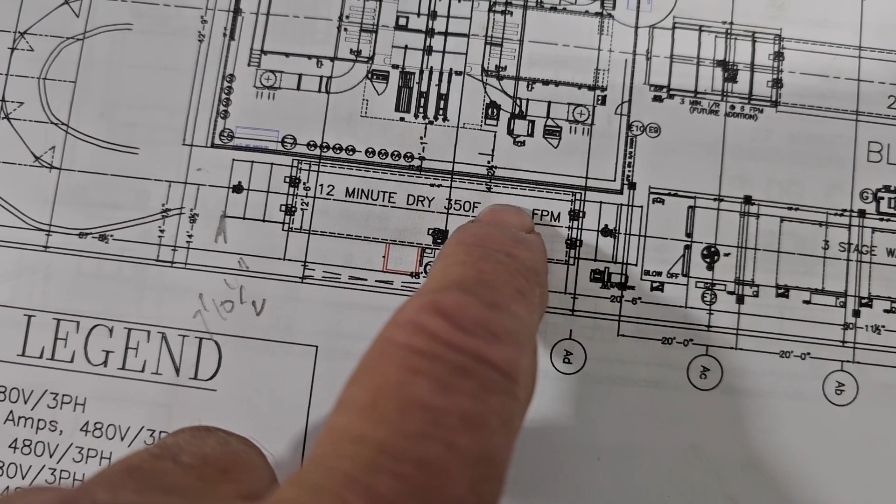It's a 12-minute dry. When they say 12 minutes at 4 feet per minute, the 4 feet per minute is the line speed. That's the speed of the conveyor line. And at 4 feet per minute, it's going to take 12 minutes for the product to get through that oven. All right, so we're working on that section of it.

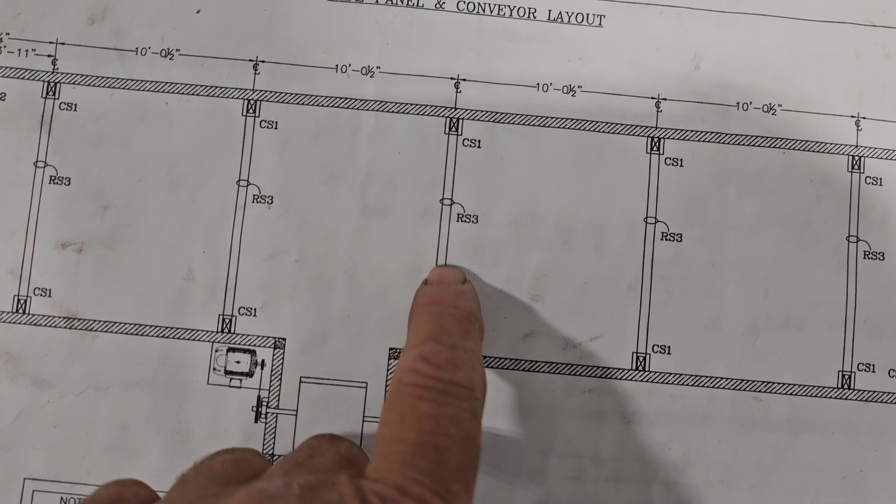And this is the actual dry off oven here. These are going to show all your structural supports. This one page covers all the structural supports. It covers all the wall panels, and it covers all the floor channels. So this one page is up to that point. So let's go look at the oven.

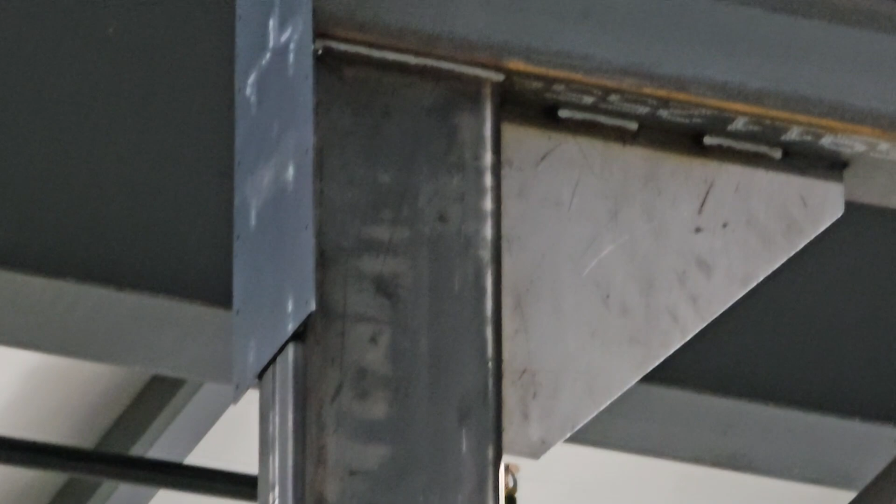Okay, and as you can see, we got all the black iron hung. Like I said before, we got all our high reach welding done on those joints up top. Might be able to zoom you in up there, maybe. Yep, that's all your high reach welds up there. Oh, you're zoomed in 12x. All right, that's too jumpy. We're gonna get you back. Anyways, we call those horseshoes. So we got all the horseshoes up.

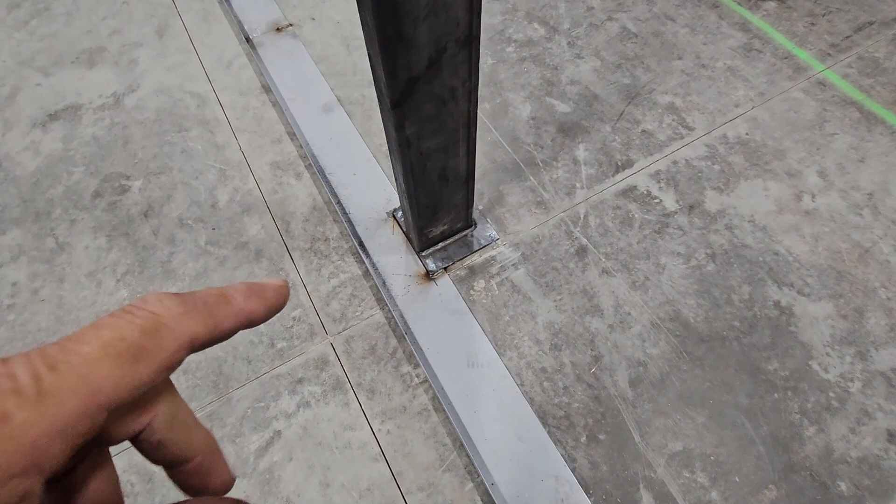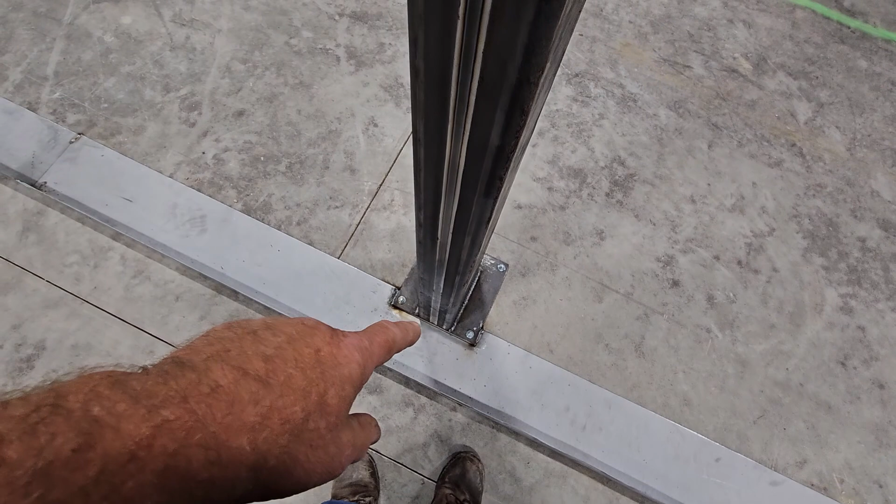And after these are bolted down and squared to the floor, everything gets bolted down there. Then we come in and we put a floor channel down. We take a plasma cutter and notch around the base plates, and then we tack weld the floor channel to the plates so they don't get lost, and we keep a gap between the column and the outside of this angle right here. That's like a 1x8 angle, and we do that with a block of wood. We keep a very specific distance between the column and the floor channel. That gives us room for the wall panel.

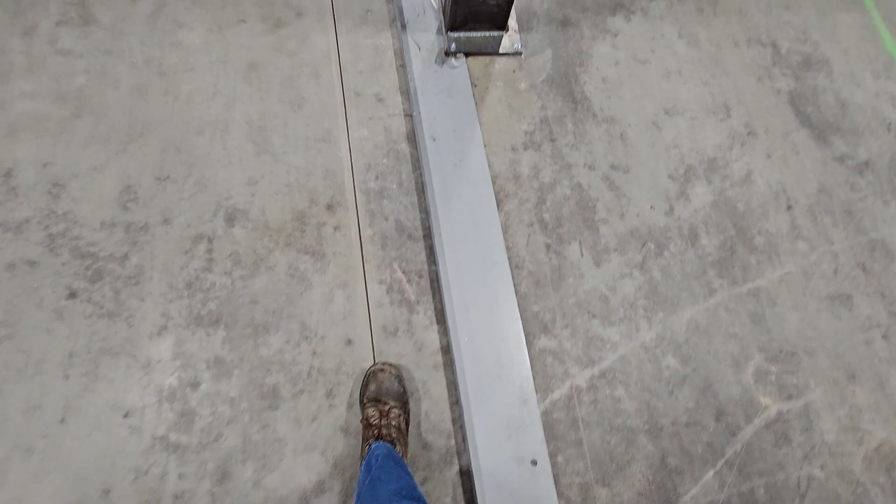So the black iron is internal to the oven. That's why we don't paint them. It would just burn off the paint anyways, so it doesn't make any sense to paint those beams. Anyways, the floor channels get tacked together at the seams. Just get a little tack weld there, and then tack welded at each base plate. And it's more the same all the way down.

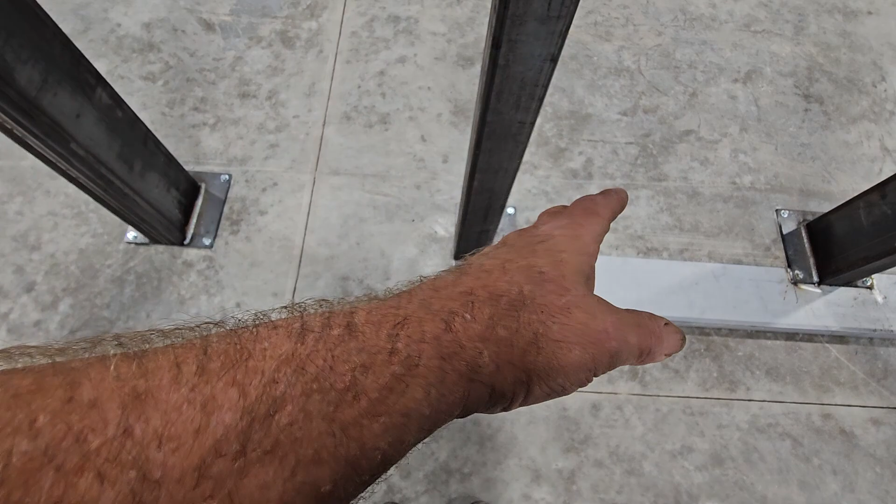Now technically the oven ends right here. This is where you're going to have an air knife. This is where the product's coming into the oven, but there's a recirculating air knife right here that creates a barrier between the superheated air and the ambient. Out here, they call that a vestibule. There's a small vestibule that also has a conveyor key in it. So it'll have a conveyor key out front here. You'll have another conveyor key right here at the air knife, and it gives a place for the air to do the transfer and not dump a bunch of hot air out into the shop.

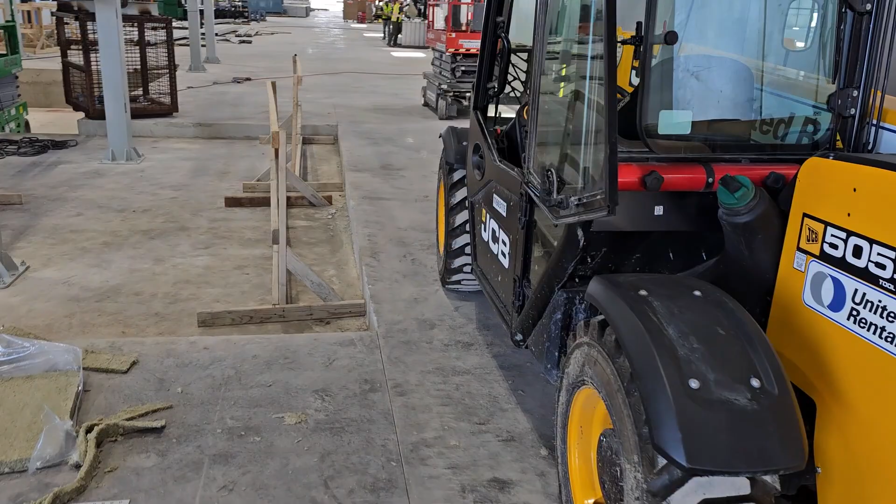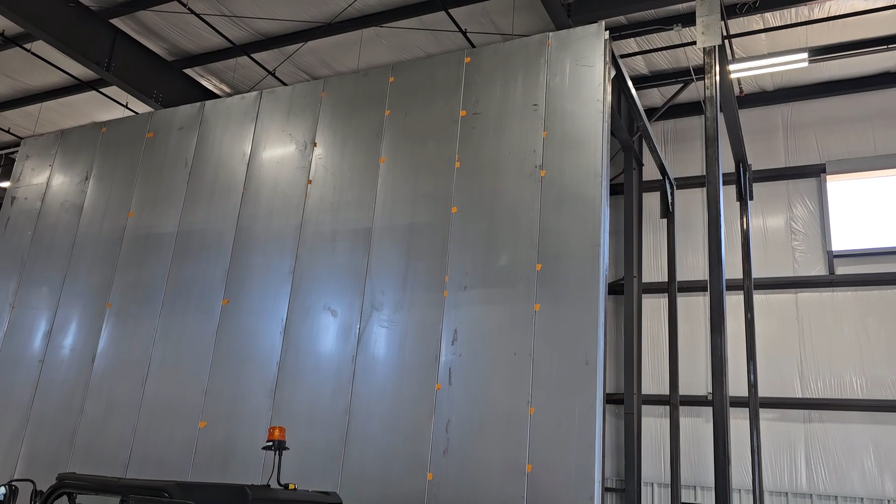Okay, so we've been hanging wall panels. We switched out our reach lift to this tiny little guy. It's actually really small and really maneuverable. It's got 20 feet of stick, and it gets us up there and puts up our wall panels. These wall panels go into a floor channel that we welded in. I think I showed you those earlier, but I'll show them to you again.

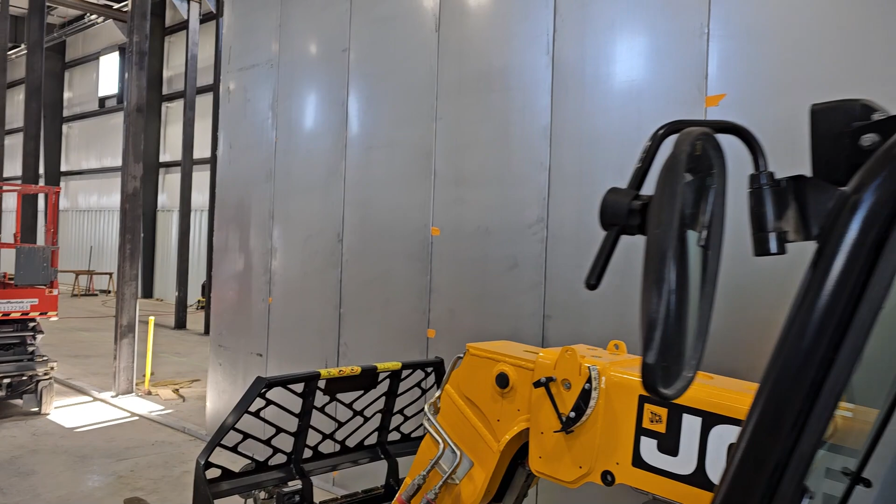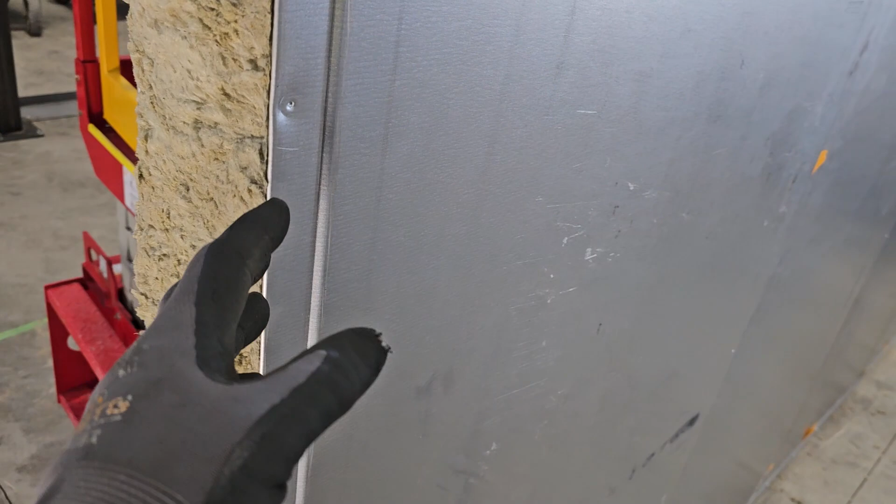These wall panels are 20 feet tall. So it's quite a heavy 6-inch thick rock wool double skin panel. And those are the panels I showed you laying on the ground. The orange tape you see is temporarily taped on the rock wool. There's rock wool in between each seam, and we pack the tongue side with rock wool before the groove comes over it. So you got a tongue and a groove, so they fit together tongue and groove style. And that's the floor channel that got tack welded in right there.

But we're standing wall panels. This right here is half a day's work, putting these up. And see these wall panels attached to that plate right up there, and those have piloted holes, and those drill into the actual sheet metal. That's what keeps this whole wall standing.

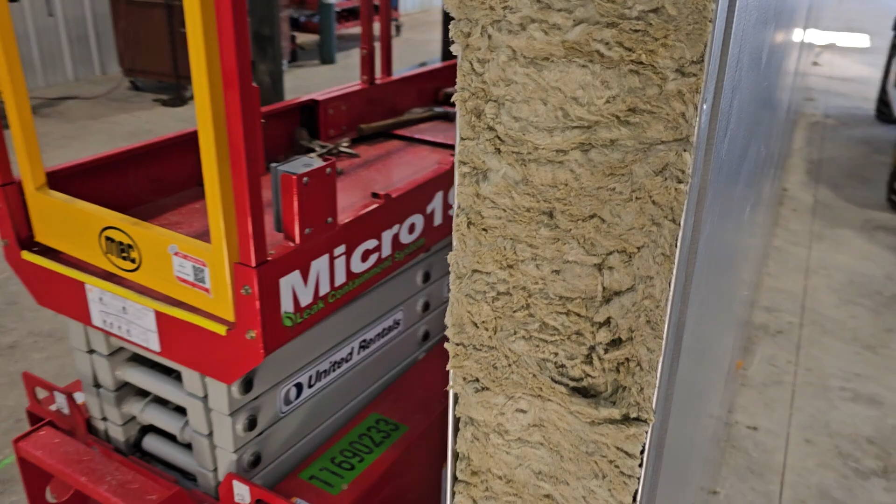All right, so basically all the steel structure, you know, stays inside. That's why they don't get painted. This is the interior of the oven. So if we painted them, it would just burn off the paint. So they just ship them black.

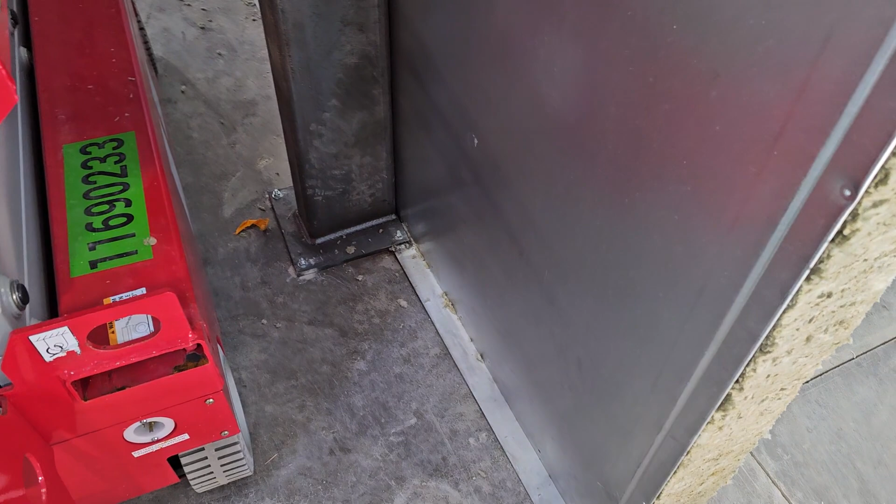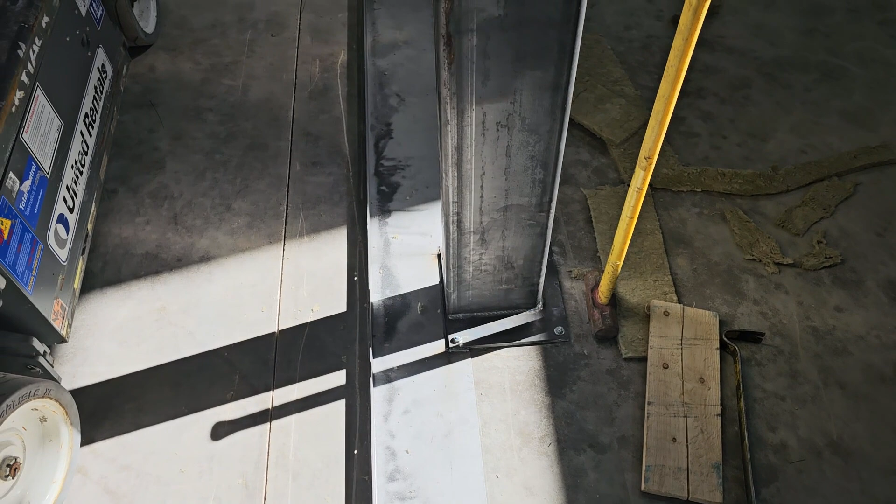All right, but that's the gap we had to leave in between the actual column and the floor channel. We made little temporary wood blocks to go in right there. That's to create a space for our wall panels. So we made those blocks 6 1/8, and our panels are 6 inches on the dot. So it's a very tight squeeze. But we've got that much wall to build here. Hopefully we get out to that by the end of the day. We roll through them pretty quick.

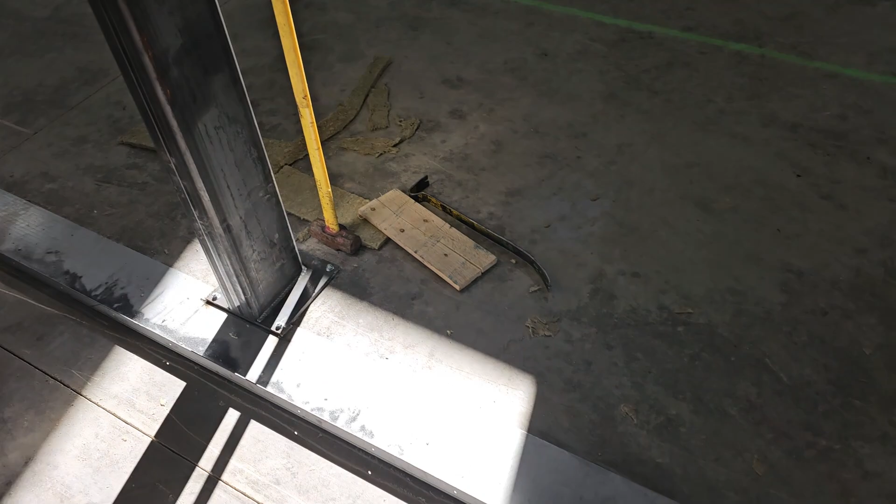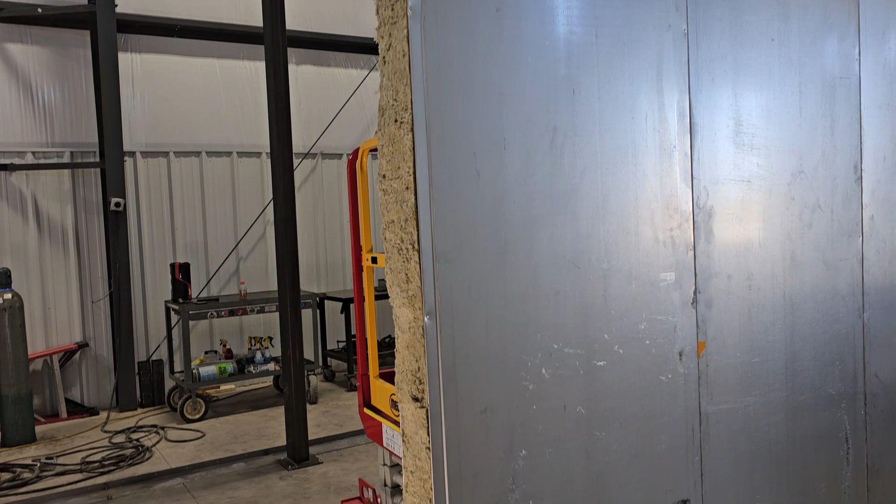We bring them in knife edge on a couple dollies, hook it up to that rig on one tip of one fork, and just zoom it out and stand her up. 2 guys on the ground, 1 guy on the lift, and then we drop them in and back them off a little bit. We fully engage the panel, and then we pull it back about 1/8 of an inch to allow for expansion.

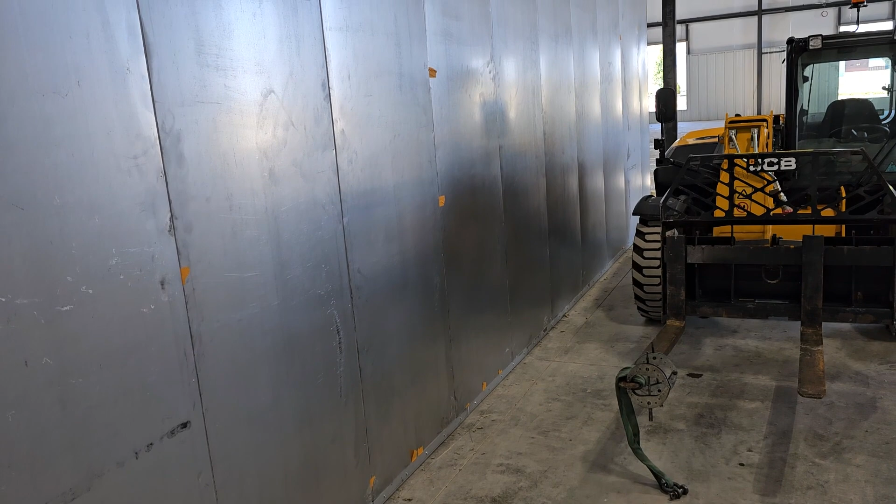Because these panels, when they get hot, they expand. If you put an oven together too tight, you're just asking to buckle the floor channel or buckle a wall or something. So never put an oven together tight. You always put them together loose and let them expand.

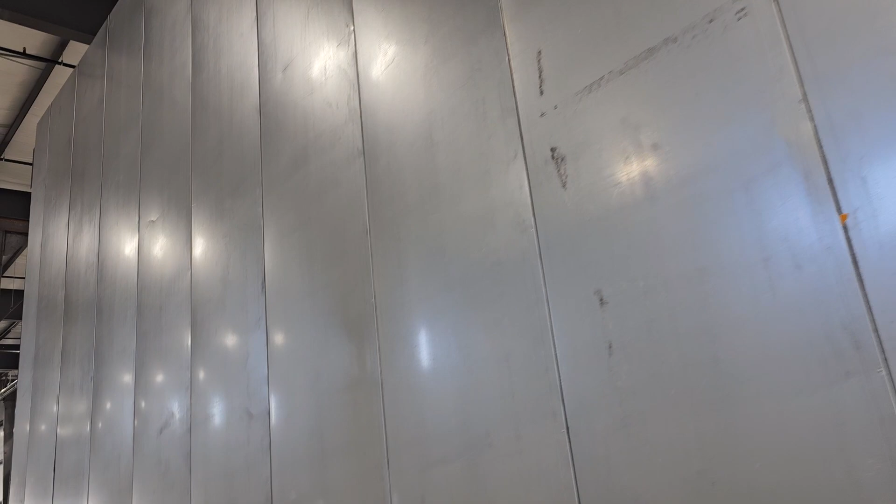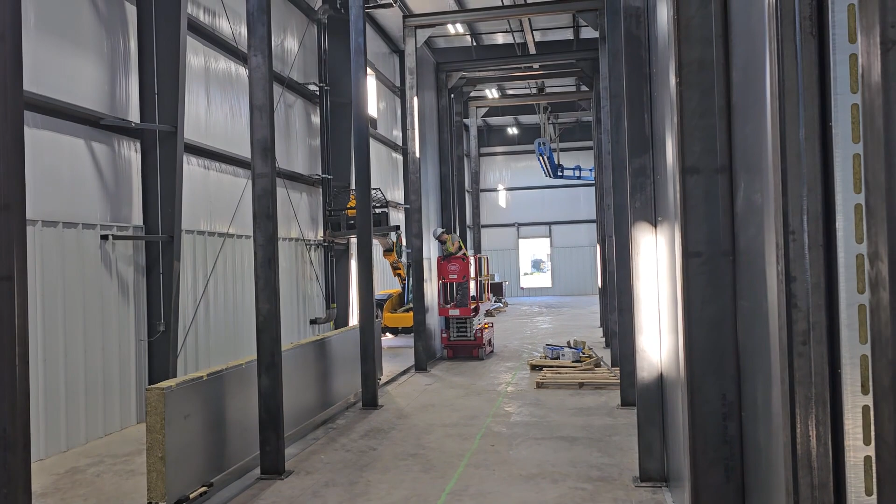Okay, so we got this wall hung yesterday. Today's Tuesday, so this wall is up. You still got to get a lid on this oven, but that'll be after we get the other wall done. So we're up to here. These last 2 columns are for what they call a bonnet or a vestibule, and we're working on the ones down there. So I got that little tiny reach lift down the aisle. That reach lift just barely fits, and we can stand our panels up pretty easy. It's hard to get far enough away from this thing to see what's going on.

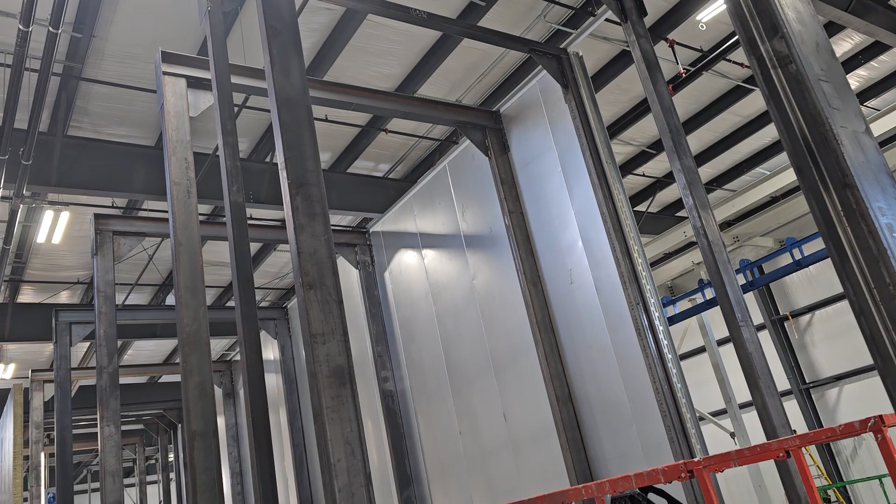So that'll be this other wall. After this wall is done, then we put a lid on it. The lid lays on the I-beams going across and gets fastened on the ends to the wall panels. Up on top, I guess you can see, do a zoom here, a little sheet metal angle that runs across the top there. It's at the top of the wall panels, and that's what ties into the roof. And then the roof panels are big enough to span the I-beams and just literally lay on top of them. So they get mechanically attached on the ends, and gravity is with us and holds it down on the beams.

So that'll be a lid. And then we got to do end caps at the conveyor ends, which they call air seals. But this is, believe it or not, the small oven. All right, so it's Tuesday morning. We're going to get another wall hung. We'll bring you back later today or early tomorrow.

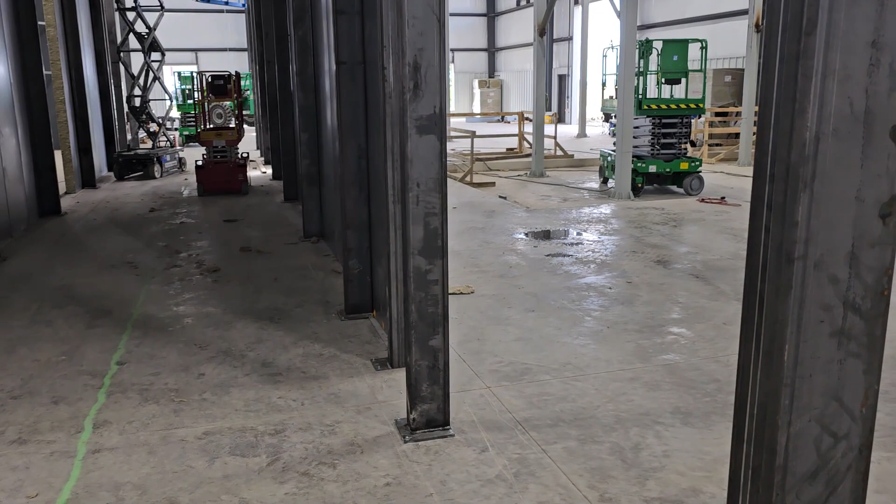Okay, so they're working on the lid now. And walls are done, both sides. I don't know where I picked up last. I don't know when's the last time I shot a video. Walls are done down both sides, and they're screwed to our floor channel. And the ceiling pretty much just lays on top of all the iron.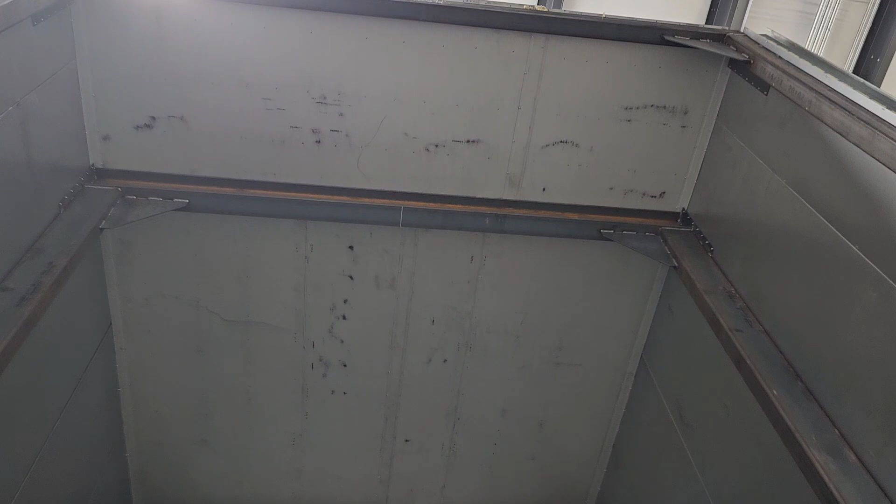They've got what they call blowout panels. I don't know if you can see in that second bay. You get up from that light. That second bay, there's a strip right down the middle, and what it does is it only attaches on one side. If there's an explosion inside the oven, the lid blows off.

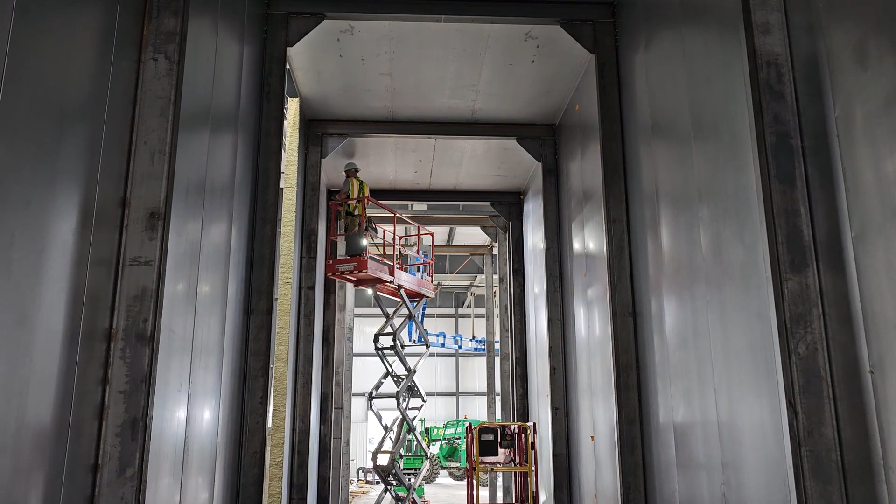It's attached on the end with those little trim angles, left and right. That's the only place it attaches. It just kind of straddles the beam and lays there. If there's an explosion, the ceiling just kind of burps up. And that occurs in 3 places in the oven. They're down on the last section of the lid.

The open wall you see, that's where our air handler goes in. Air handler is our blower and our burner and all our gas controls. Those go in. We don't have those yet. So that's what's coming in down in that open bay right there.

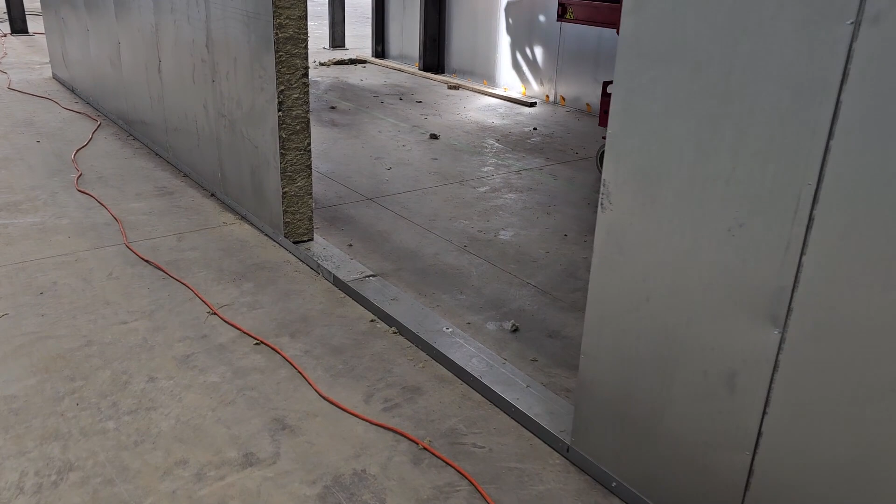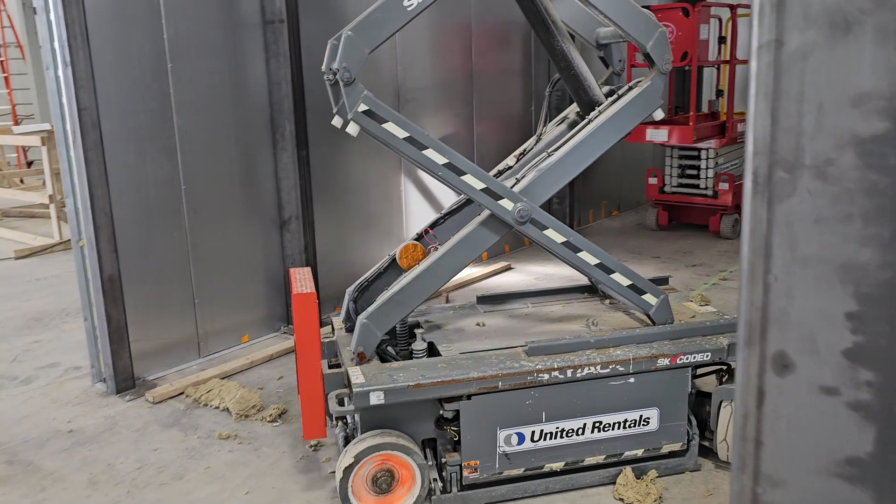Alright, so today's Wednesday, and we've got pretty much an oven, the main frame of the oven standing. And they're inside just anchoring that lid on the end channels. Okay.

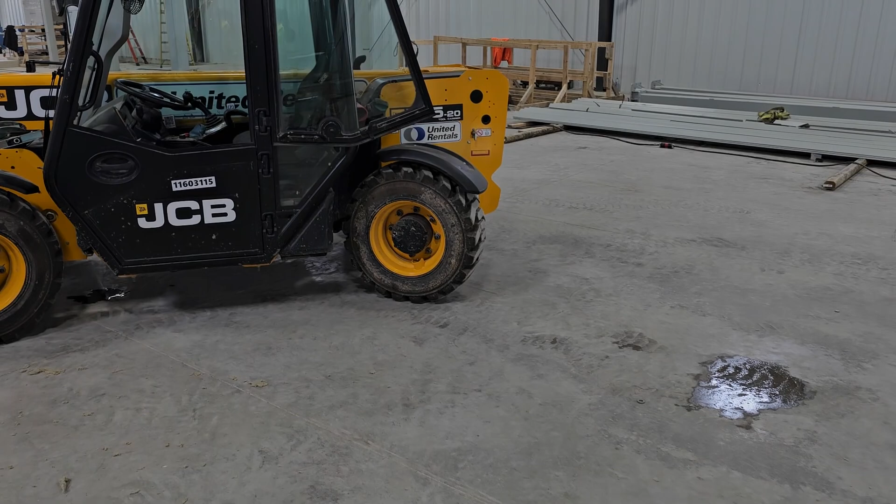I actually got rid of my big loader and got this little guy. This little thing is so versatile, it's not even funny. It's small, it's maneuverable, it fits down the aisle. I actually used it down that aisle there to hang the wall panels. Super easy to drive,

smooth little machine, and she's got 21 feet of stick on it. It'll get up 21 foot, so it'll get up on top of our oven to land roof panels, no problem. So I'm really glad I traded in my big telehandler.

Okay, morning everybody, it's Friday, and I was going to walk around the job, show you our progress during the week. I got to close up this video, get it edited, and ready for upload for y'all's Saturday morning powder coat update. All right, we got the Varzy boys right behind me there working on some columns, and I'm going to flip the camera around and we'll go show you the dry off oven that we just got to a substantial completion where someone else can get in there and work on it.

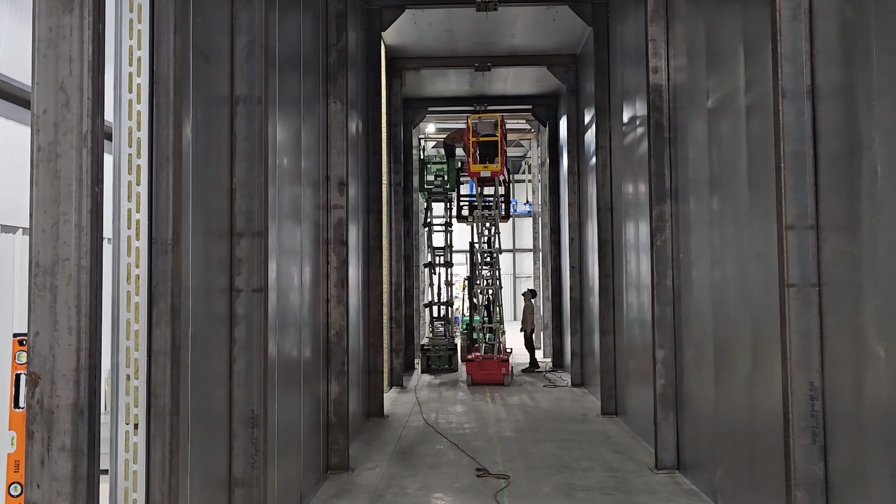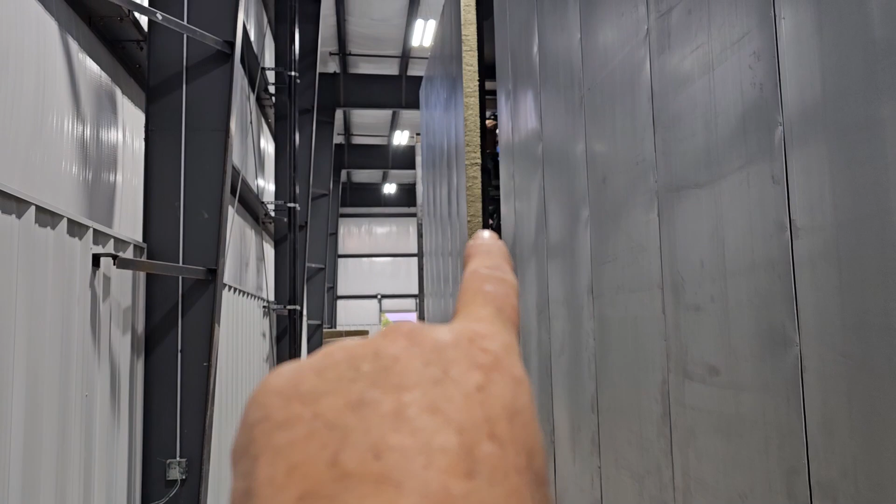This hole right here is for an air handler. There's an air handler that sits on the ground right here, and these little panels here make up the space above the air handler. The air handler is only about 8 feet tall, and then the rest of it's panels up there. So that's an air handler I do not have yet. The air handler actually fits in this aisle, comes this way, and it'll plug right into the side of the oven. But all the grooves are insulated and ready to go.

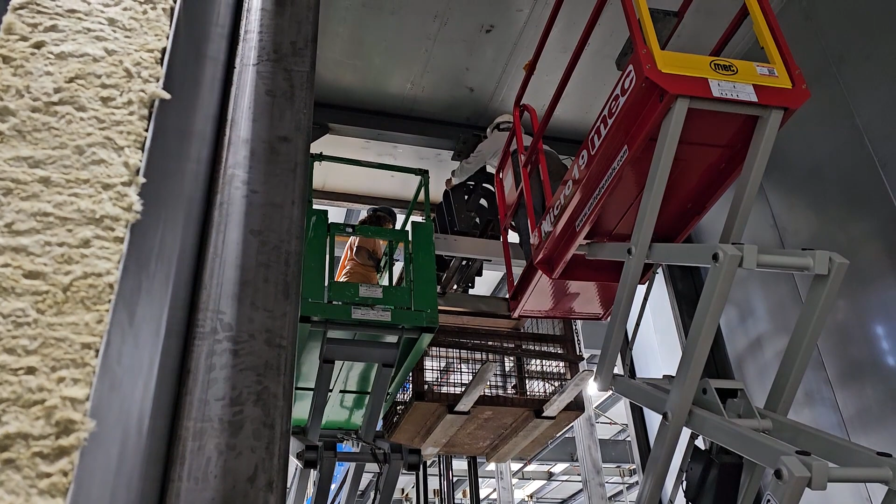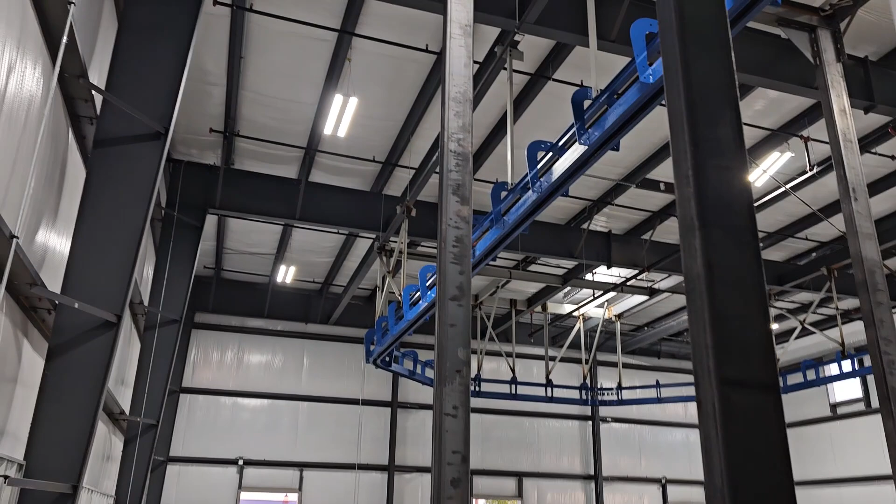Let's go visit Kentucky. Kentucky has put in an expansion joint in their conveyor. Usually a conveyor rail is going to run pretty hot within the oven, and as you would expect, the conveyor rail can expand, and if there's no expansion joint in it, it will buckle. And you see they've switched over to black iron conveyor because it would burn the paint off anyways. Doesn't make a shit bit of difference.

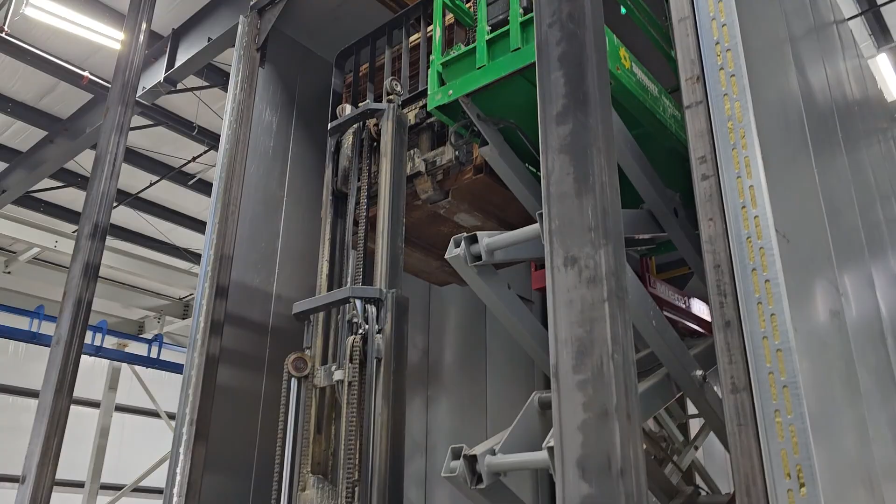Morning, Cameron. Morning, how you doing, buddy? I'm doing good. I can tell you're focusing your chi, grasshopper. Yes, sir. All right. Well, we'll leave you all alone. All right, well, these fellas are doing their job. I'm staying out of their way. I'm just gonna shut up and get out of here. They're doing a wonderful job.

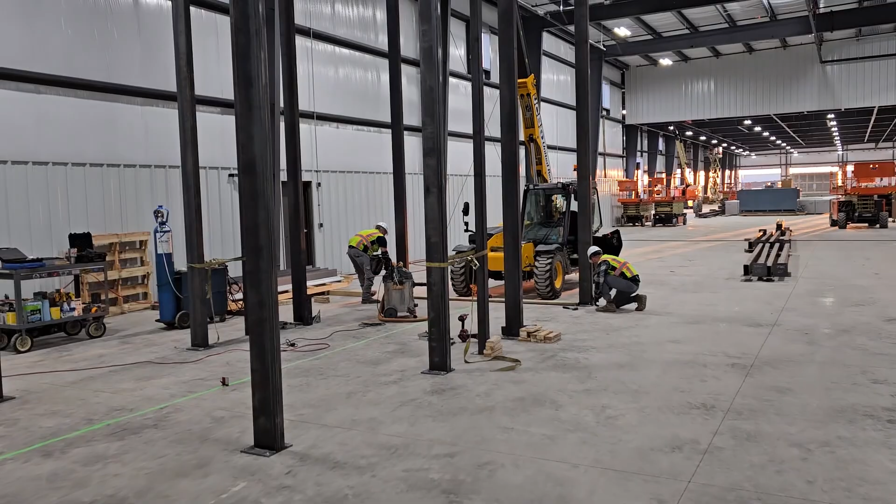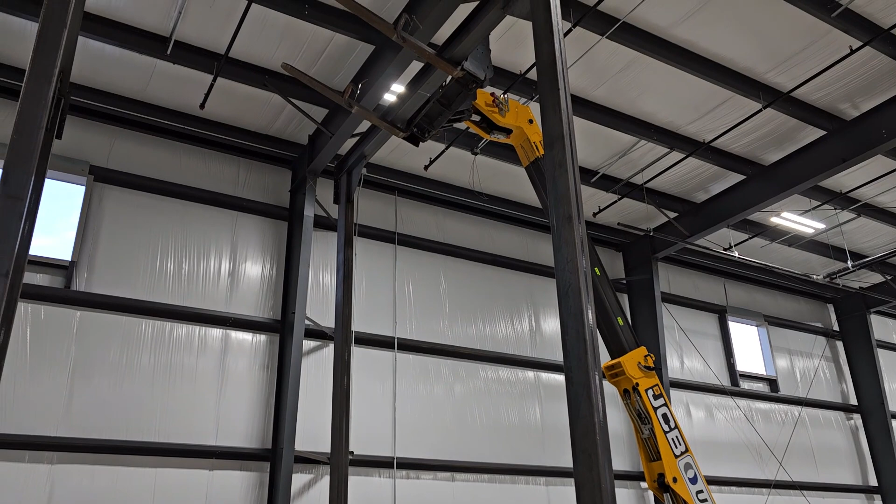We're working on the cure oven, and it's more of the same, but it's just bigger. We got a longer dwell in this oven, so the oven actually has to be physically larger because the line speed is constant. We've got our little loader. All we do is build these horseshoes on the ground and stand them up. Pretty easy to do. We use a spreader bar, which is just a pre-cut block of wood. Then we use a laser to square them up off center line.

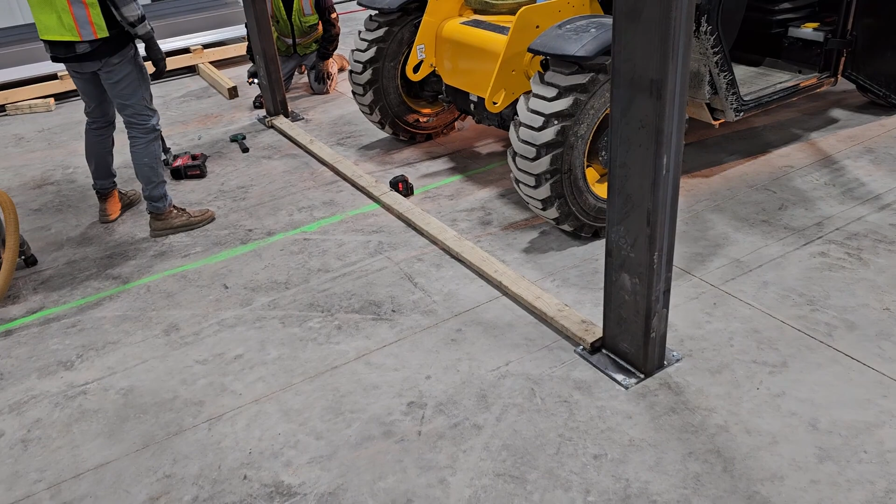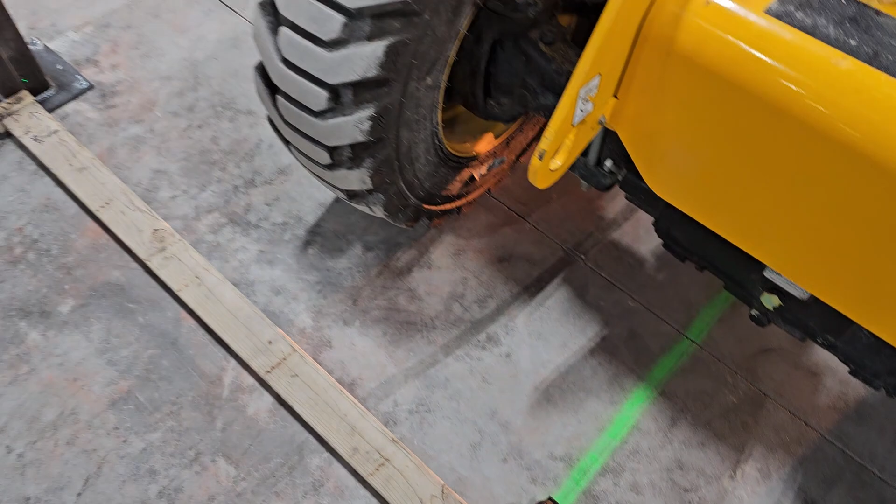We've got a laser there. Let's see if we can get you in the camera lens. No, I'm not that good. I was trying to blind you with the laser. Anyways, I use a spreader block across the center. Green dot over there. Green dot over there. And green dot on the target down there.

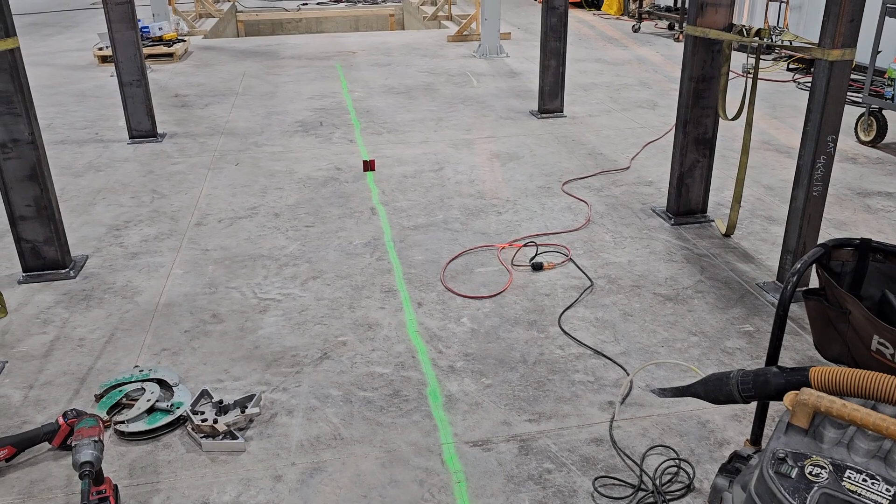All right. And this oven actually goes all the way down to the corner down there, to that fire break. This fire break curtain. So that oven goes all the way down. They had to put a fire break in because this is all the paint shop area. So if this side of the building caught on fire, that's a break to keep the flames from rolling out on the other side of the building. So that's a fire break.

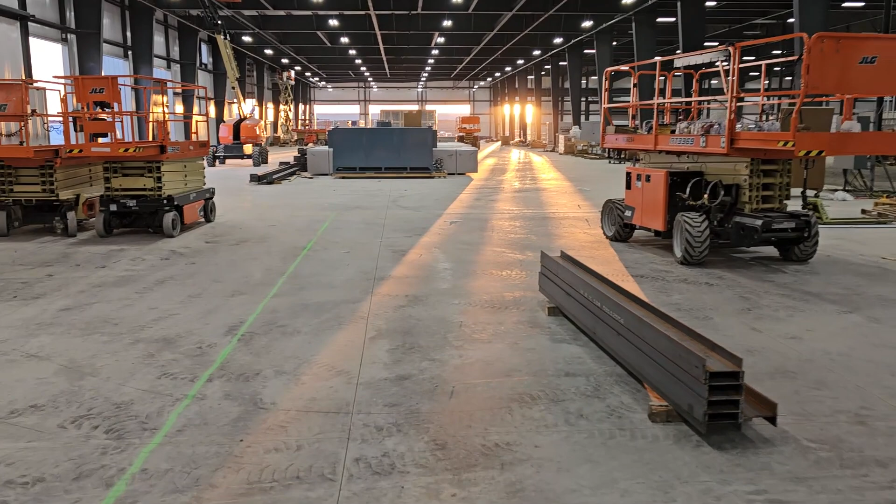Pretty typical when you're separating a paint shop from a manufacturing plant, especially one that has welding in it. The welding area is over on that side over there. So anyways, our oven is represented by this green line and it comes all the way down to the fire break.

So our oven comes clear down to here. And you can see our little string line, how we cut it in. Lay a string down, spray it with some bright, easy to see color. But that's how far this oven goes. This is a big old long sucker.

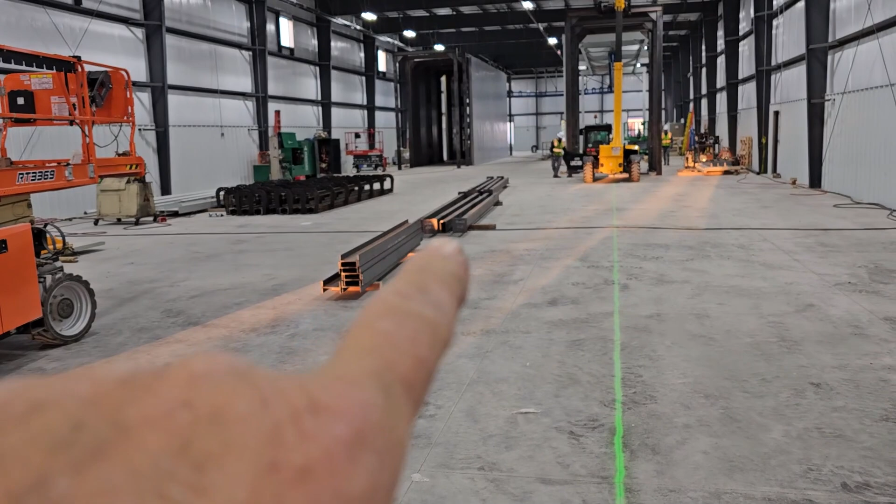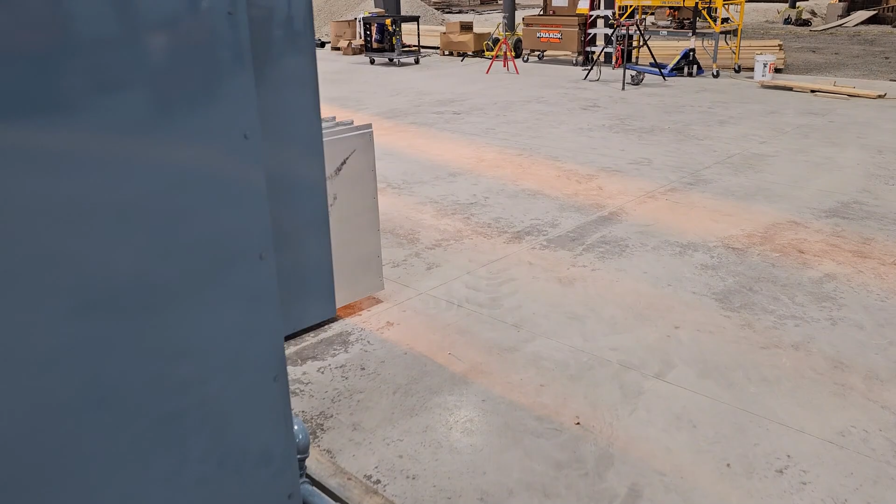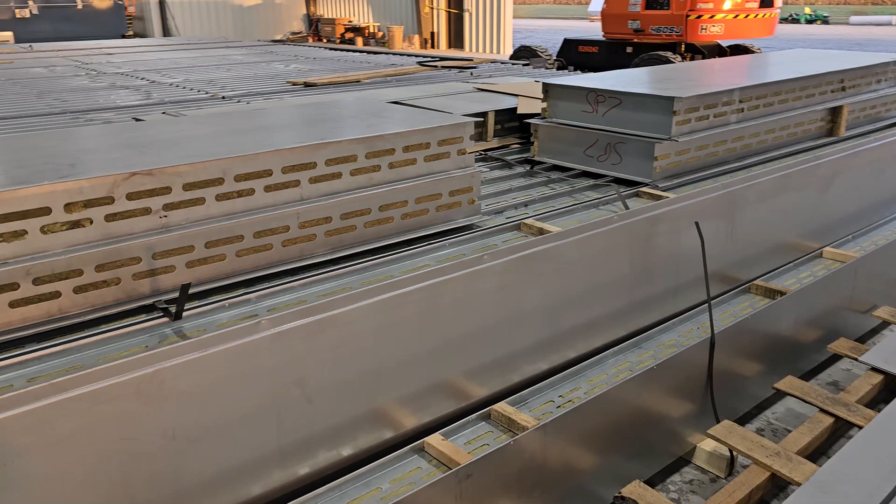Alright. And that's some of our material over here. Those are just our vertical columns and horizontals. So we got a hell of a lot more over here. So that's all the steel we got there. And then after that, it's more of the same. More of the same with panels. Start hanging panels. So all these belong to that large oven. Everything's already used and done for the small oven. The small oven's already skinned, so all this is all for the big monster we're doing right now. Okay.

And then they haven't even got floor in over here. This is the sandblast area. They're doing a pit over there for the sandblast. And then fabrication's kind of over here, and the conveyor runs through all that. So this project's still in its infancy.

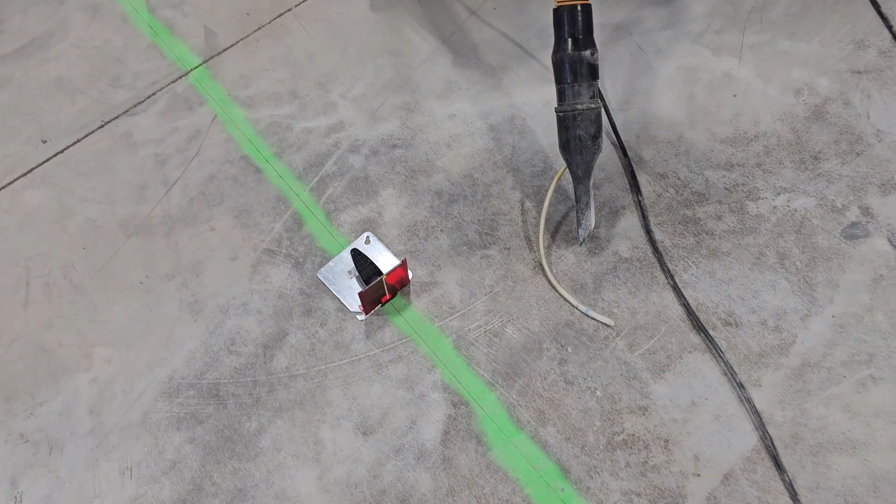Okay, I got a bunch of emails about wanting some detail on the laser. That's the target. It's a magnetic target. I got it sitting on a 4S cover. You can see the green dot on the line. That superimposed line is with my conveyor center line. That's the center of the world for us. Everything gets measured off that center line.

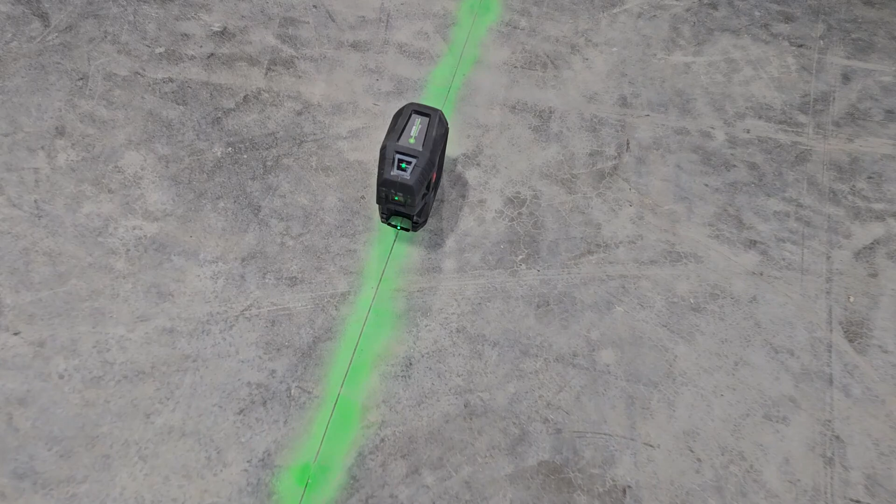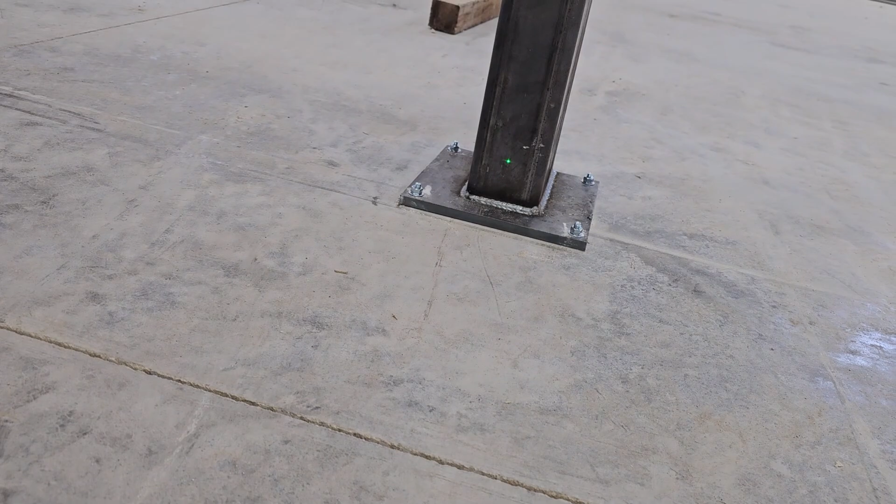So this is considered an x-axis. That black line is considered a y-axis. You see I got my laser dot there. So I've got a laser dot here and out of here heading down to that target I just showed you. And out this side and out this side, we're center line column. And we're center line column. Now the kicker is to get these things in square when everything disappears all at once.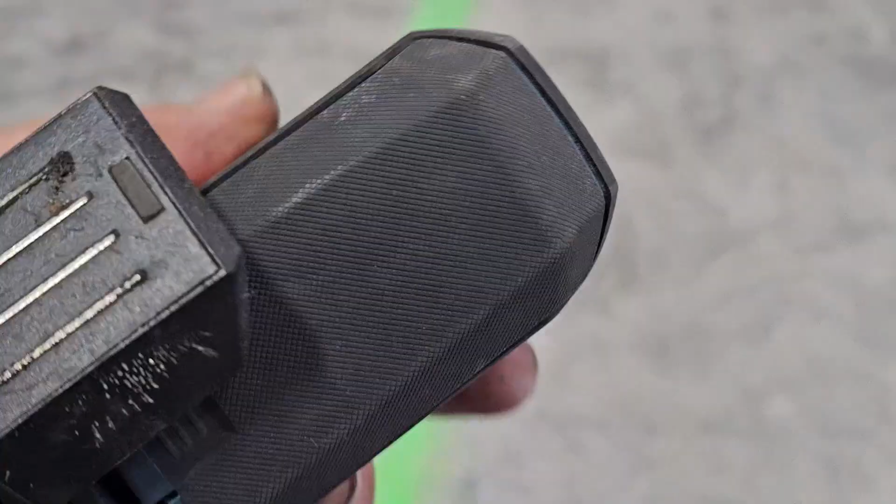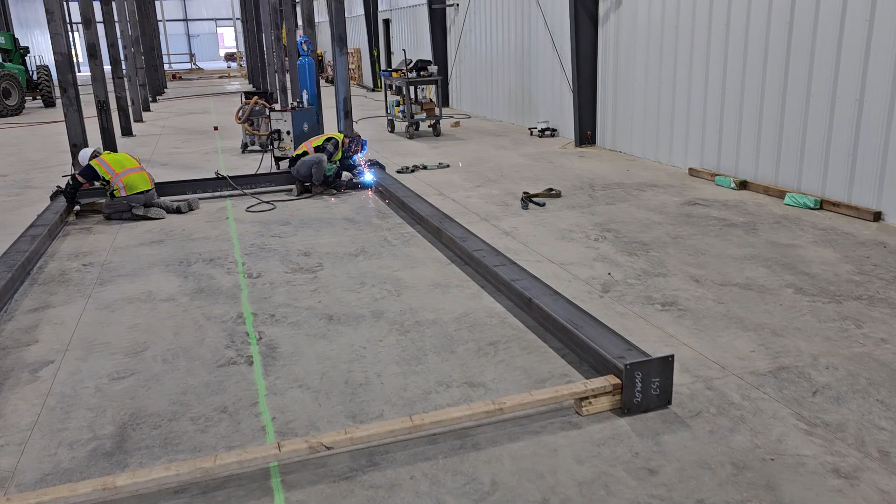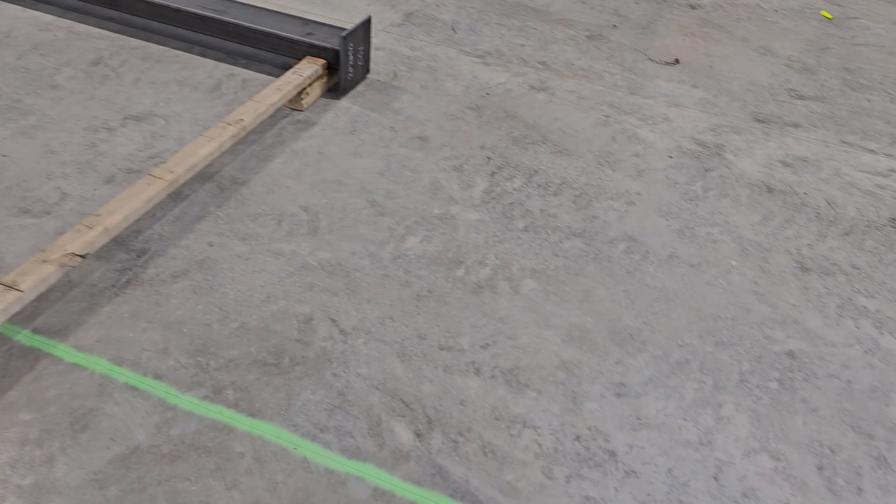Well, we're coming up on the end of the day. This is how far we got today on the curing oven. And we're looking right down the barrel of that conveyor straight through to the powder coat section. And this green line, like I said, represents the oven, which just keeps on going. So we're going to work a little bit tomorrow on Saturday and be able to probably finish this up, get all the steel standing at least. I think we've still got about eight or nine more sections to put together and stand up. But you know, you gotta sit there and square and plumb each one.

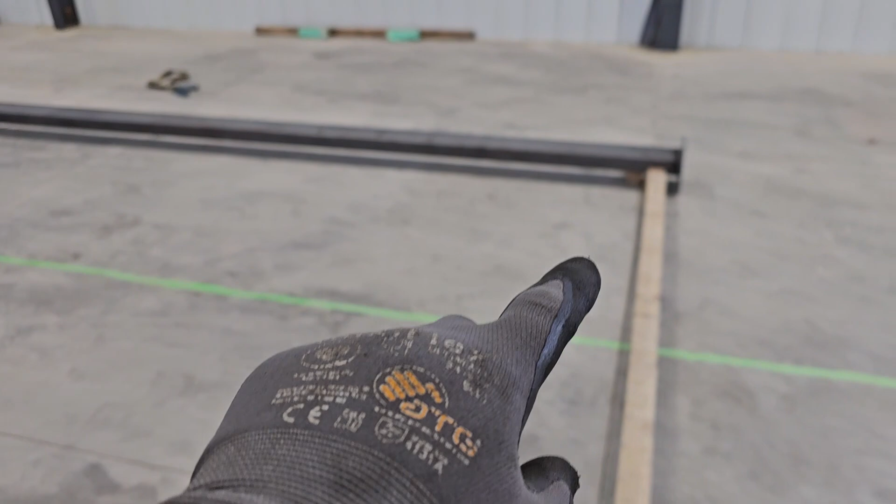If you look how that wall is, when you transfer by it with your eye, they all disappear all at once. So that's how you get a straight wall on a big oven. A lot of time and a lot of setup when you do your layout here. Make sure you put in some kind of a spreader bar or something to hold your bottom at a specific distance. We actually keep these a little bit wide at the bottom and let the weld pull them in. And when you stand them up, they're, I don't know, we do them about 1 inch wide at the bottom.

And then when you stand them up and put the other spreader bar in, sometimes you have to take a ratchet tie down and just go around both legs and just kind of pull it in. And other times you don't, depending on how the steel reacts and how the moon's aligned with the stars.

All right, but this is going to be the end of this video. You know, this is my week 2, and it's just been a lot of welding, cutting, grinding. And you see down there, they got conveyor all the way through my oven now, so they did good today. Pretty good for a Friday.